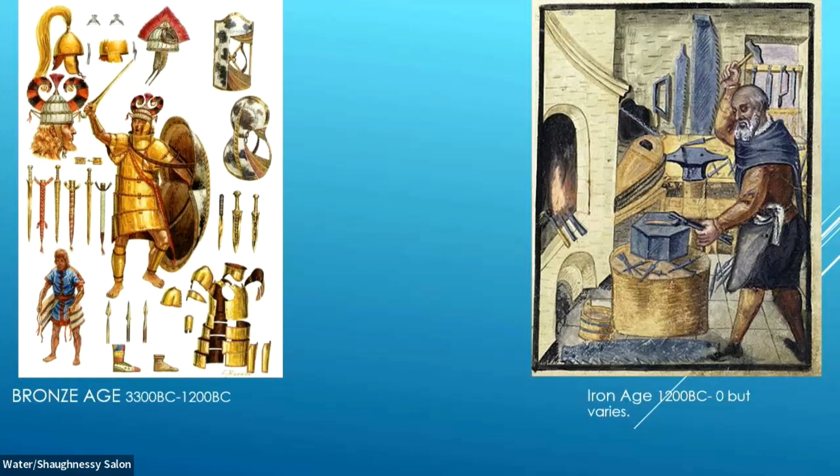So how do we deal with that? You're going to learn about different types of corrosion. I want you to know about all types of protection when we're dealing with corrosion. I am now representing IPP West, which is Integrity Pipe Products West. We deal with anodes, we deal with Denso, but there are different types of protection out there, and I'm going to show all of them to you. I'm going to show you what they do, what the downfalls of them are, what the benefits of all of them are. Because I'd rather you use something and think about corrosion in some way than use nothing.

Okay? What about this, for example? We're going to learn about different types of corrosion. This is the bronze statue that was found in England, actually. It's Roman. It was in the ground for 2,000 years. Why isn't it gone? It looks exactly like it did 2,000 years ago. Why isn't it gone? We're going to learn why, right?

But first, what I'm going to teach you is, where am I getting all of this information from, right? Well, I'm getting it from several places. NACE, I'm getting it from the American Petroleum Institute. I'm getting it from tons of different places. So I'm trying to collect all that stuff and put it together for you.

Sorry, I'm used to walking around and talking and engaging people, so I'm not used to standing behind a podium, but, oh, can I use that? Great. Sorry, camera guy, you're gonna have to follow, right? All right, cool. Did it work? Hello? Hey, guys. Can you hear me? Can you hear okay?

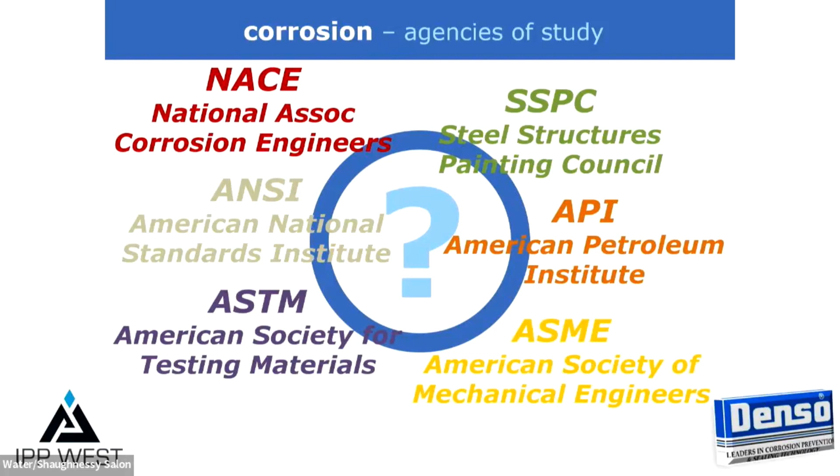Oh, there we go. Okay, so that's where I'm going to get it from. But here's a fun fact for you. Everything that we're going to talk about and everything that you're going to learn is all in the vitamins you take. Magnesium, phosphorus, copper. There. Is it better over here? Okay, so that's your fun fact.

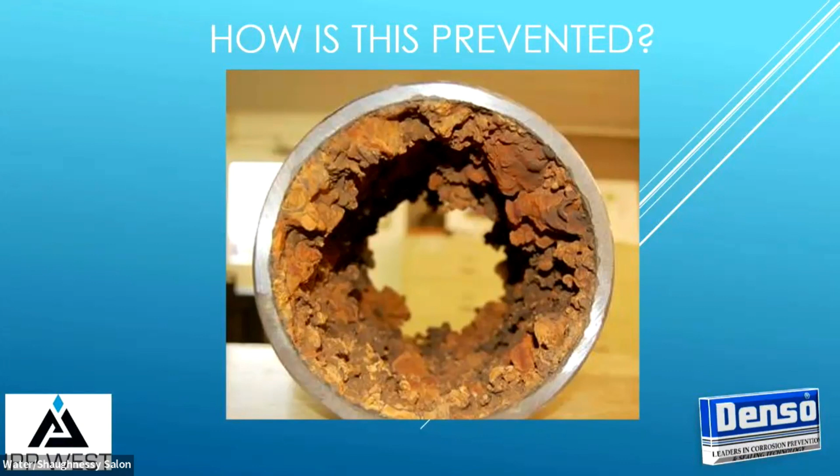What is this, guys? I mean, you can shout it out, but it's kind of redundant. But what is that? What causes that? First of all, what is it? It's called tuberculation. And tuberculation is when iron oxides attach themselves to an iron pipe. Okay, and so they... Here, I'll go. Can you hear me? So how is that prevented?

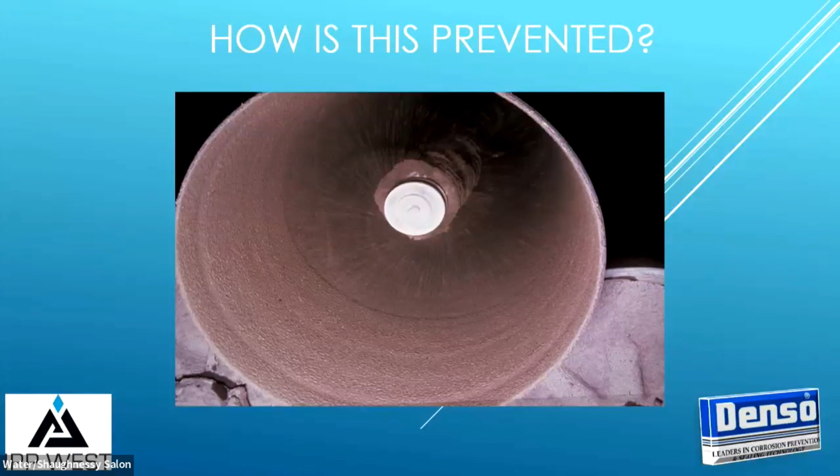What do we do? Well, it's pretty simple what we do to prevent that. Anybody that deals with iron pipe now, when you buy new iron pipe, you never see this. That's how we prevent that happening. We put a very, very simple cement mortar lining in it. Why does it stop it? The iron oxides in the water don't know that the iron is there, so it can't corrode. It's impossible now. So we're going to learn what different types of corrosion there are.

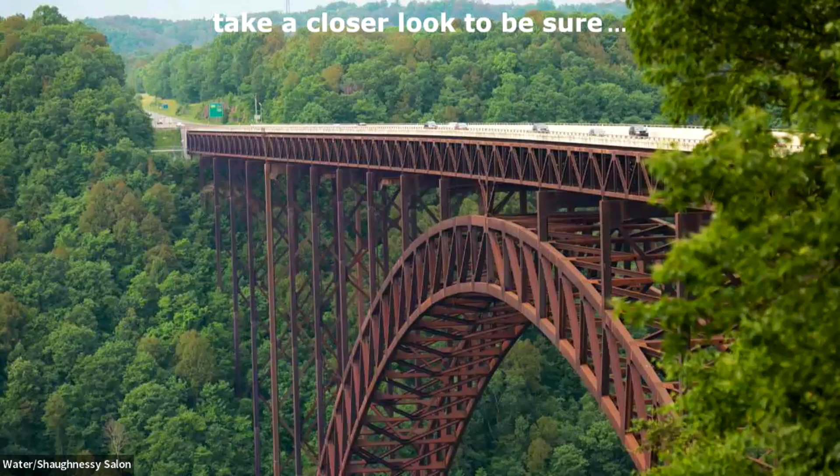Here's the trick one. Is this corrosion? Yes, but not really. Why is this not corrosion in the sense that we're talking about now? What is it missing down there? Oxygen, yeah. There's no oxygen down there, so what's happening to this ship? What's happening to the Titanic? It's being eaten, right? So it's not the corrosion that we worry about here because there's no oxygen.

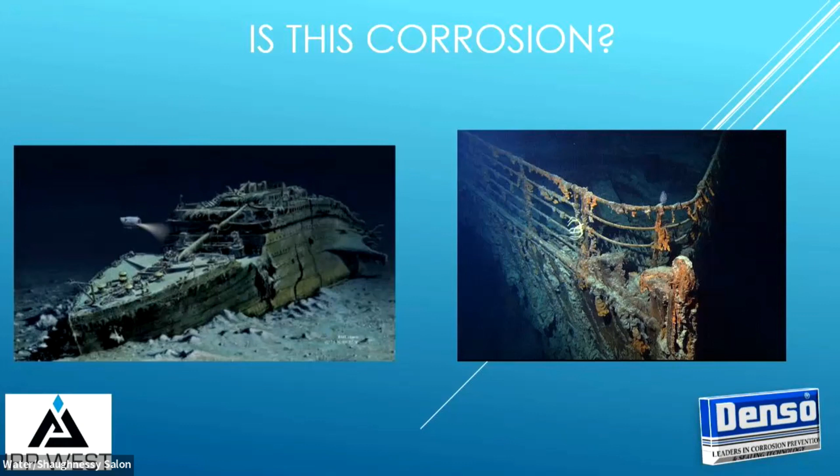So let me look at the two types. Now, like I said, I don't have a lot of slides that have a lot of writing, but these ones are important. The types of corrosion that we're talking about are microbial corrosion and galvanic corrosion. They're both important. Microbial corrosion is a biocorrosion. It's caused by microorganisms. Oxidation is another term. Rust is another term.

The iron pipe guys hate the word rust, but that's what it is, right? Galvanic corrosion is when a corrosion cell is created by an electrochemical process. So there has to be an electrical connection. That has to happen or you don't get it. Okay, and it's actually simple.

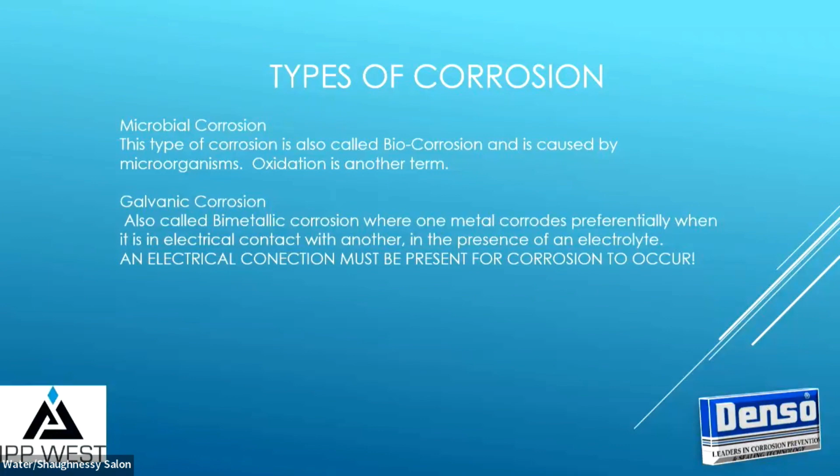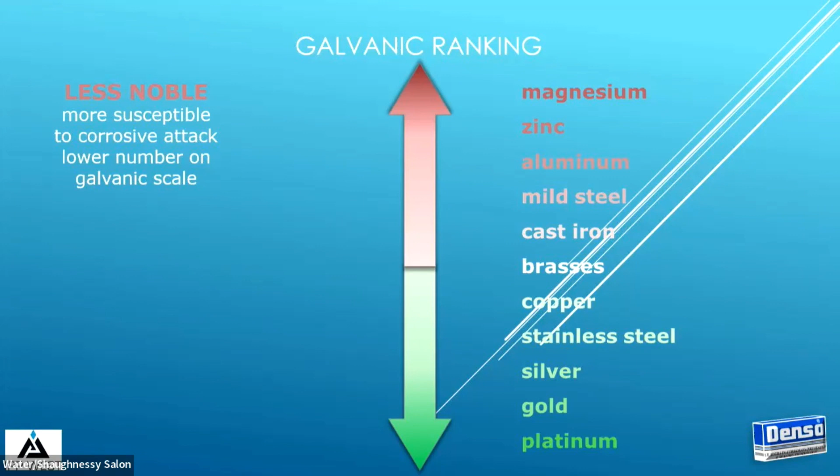So let's look at galvanic rankings, for example, okay? When we're talking about it, we're talking about magnesium, zinc, aluminum. Those are all highly corrosive metals, right? That's why we make anodes out of them. We want those to get corroded before we want the iron or steel to get corroded, okay? What's all the way at the bottom? Gold and platinum, right? Brass is another one that doesn't corrode very much. Copper is pretty good, but gold and platinum don't corrode. Well, we can't really make pipes and we can't really make bridges out of gold and platinum, so we have to figure out a way to protect them, right?

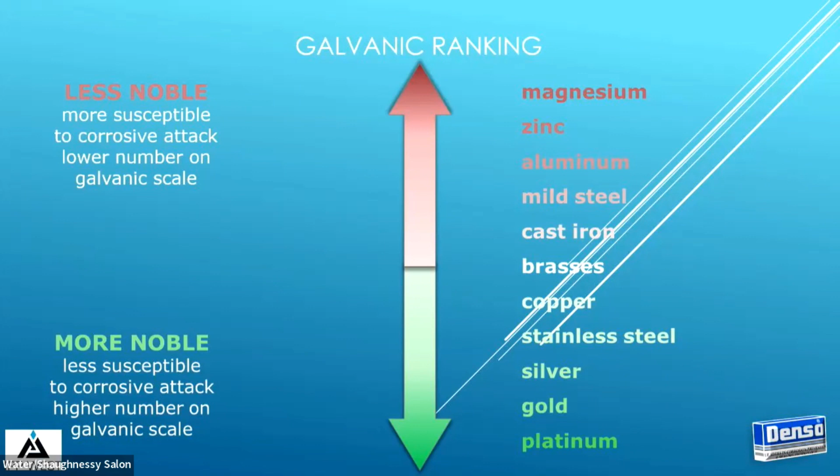So let's talk about potentials from the metal to the soil, okay? So we have less noble and more noble. Here it is right here, okay? When you see this, it's kind of confusing a little bit because we're talking about an electrical current, but I'm talking about minus numbers. Okay, what do I mean by that? Well, it's really important to understand, because when I talk about minus numbers I'm talking about the energy that's getting taken away.

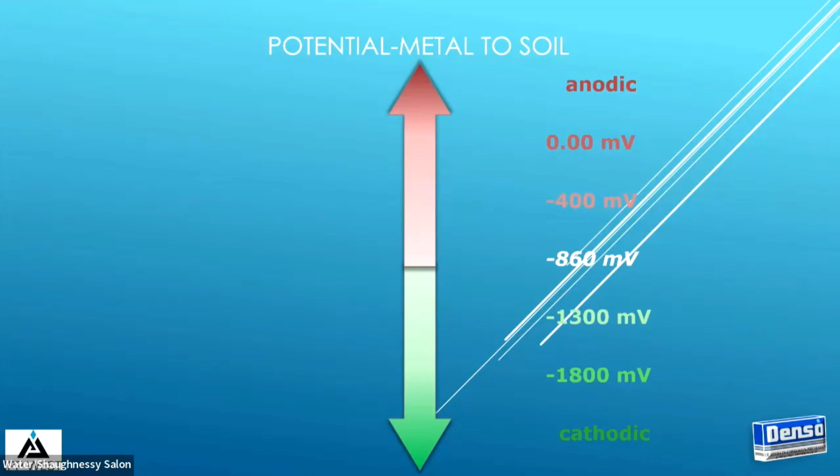Okay, when we make a material, whether it be a pipe, a valve, a restraint, a bolt, whatever we make, we put energy into it. We melt it, we form it, we shape it, we do whatever we have to do to make it. We pack it, we put it away, and whatever it is, we add a bunch of energy to it. What the corrosion is doing is it's taking away that energy with it. So, for example, iron, when it corrodes, it'll corrode at about minus 525 millivolts. That's an incredibly small amount of energy, okay? We're talking about a little battery like that, 3 volts. So it's not a lot of energy we're talking about.

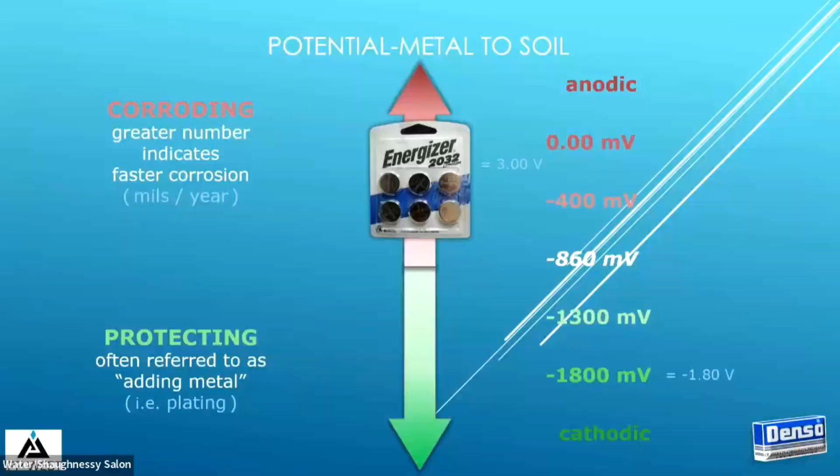So what can cause that? What are things that can cause that? Well, the soil itself can cause it, depending on what the soil is, whether there's iron, the redox value in the soil. So that can cause it. A rail line can cause it. A power line can cause it. Anything that's causing a stray current can cause it. It can be anywhere. It truly can be anywhere. It's not a matter of my soil.

If you're talking about an engineer that's been designing your lines and you guys are installing them or the operators are putting them in, and they're saying, well, our soil's not corrosive, that can change. They put a road nearby or they put a rail line nearby. They put a power line. They put a new subdivision. They dug up some soil that they didn't know. Now all of a sudden you have a corrosion cell that you didn't know that you had before. It can be anywhere.

But let's look at the ingredients. You only need 4 things. If you don't have one of these 4 things, you don't have a galvanic cell of corrosion, okay? It doesn't happen. So we have to have these four things. We have to have a cathode, an anode, a return current path, and the electrolyte.

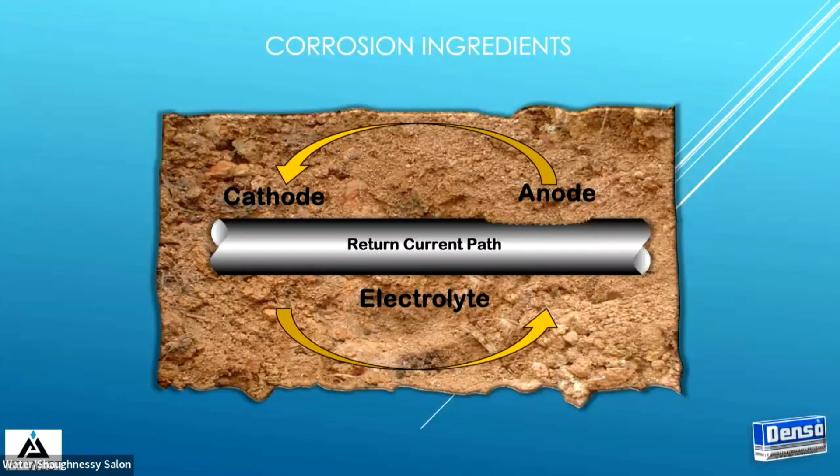So the electrolyte is the soil. The return current path is the metal component, whatever the metal component; in this case it's a pipe, but whatever the metal component is, that's what it is. And it'll always corrode at the anode part, which is why we have sacrificial anodes that we put on, right? So what if we took one of these things out? Well, then we don't have a cell anymore.

Since football season has started, let's do it with a football analogy, okay? We need a ball. We need two teams, a cathode and an anode. Winning team, a losing team. We have to have that. We have to have a place for them to play, which is a field. If I take the field away and they're just playing on nothing, can't play a game.

It's just that simple. Whenever I talk about electricity and electric currents and millivolts and amps and all these things, everybody thinks that's the stuff that's hitting the pipe, attacking the pipe or the metal component. It's not what's happening. They think it's this big current that's attacking it, but that's not what's happening. The energy is leaving and it's taking the metal with it. That's what corrosion is. Okay, so it's de-energizing metal components.

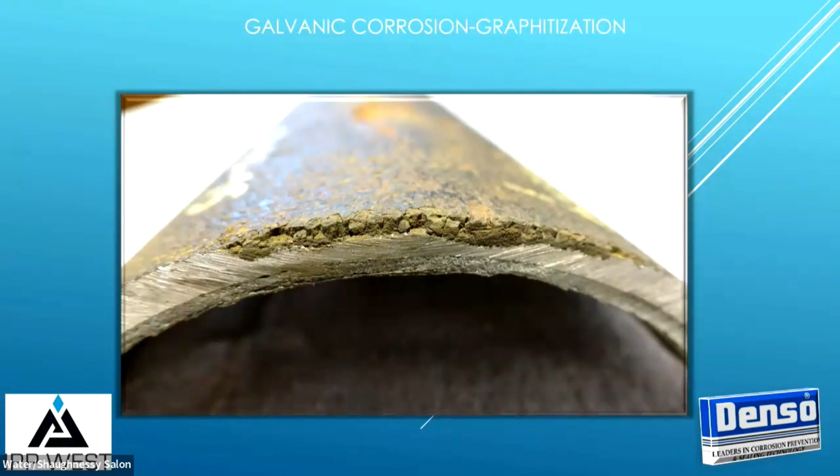And I have a really great picture here that'll show you exactly how it works. It looks just like this. So we're looking at this piece of pipe and it hasn't broken yet. What's happening? Well, it kind of looks like an apple crumble on the top there. That's where that energy is starting to leave. That's where the energy has jumped right off of that pipe and it's gone to a different place that it's attracted to.

So it's jumped off that pipe and it's gone on to something else, and it's taken that energy, that metal, and it's gone with it. And as soon as it gets down to the cement mortar lining, boom, you have a leak, right? So what do we do? First of all, what's the cost of corrosion?

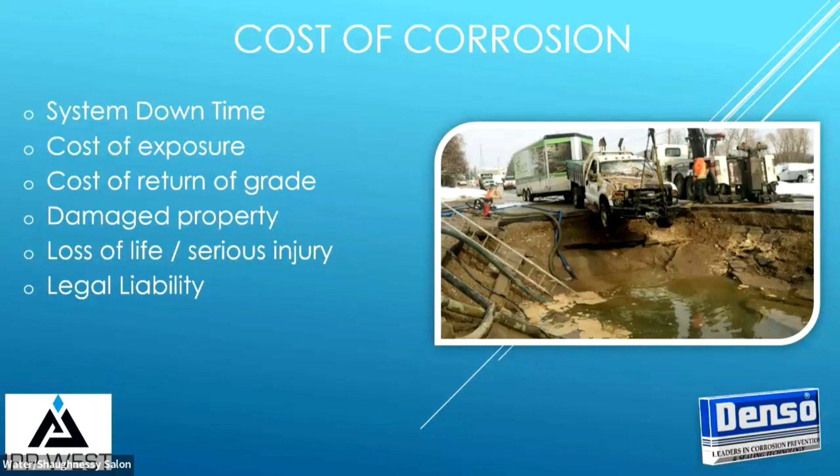But let's be real. Canada's never done a study on this, but the US has done a study on cost of corrosion. So let's use the US, and I'll break it down for Canada. The US did a two-year monetary study, and the direct effects of corrosion on infrastructure were found to be about $276 billion a year. That's a big number. What is that per person? About $1,400 per person, every living person, $1,400 a year.

How do you pay for that? Well, you don't get a corrosion bill in the mail saying this was your yearly cost of corrosion. You get it in taxes. You get it in water costs, all that stuff. So anybody will have to pay $1,400 a year down there. What does it cost for Canada? Well, if you extrapolate the numbers, we get about $363 a year per person. Doesn't matter how old they are.

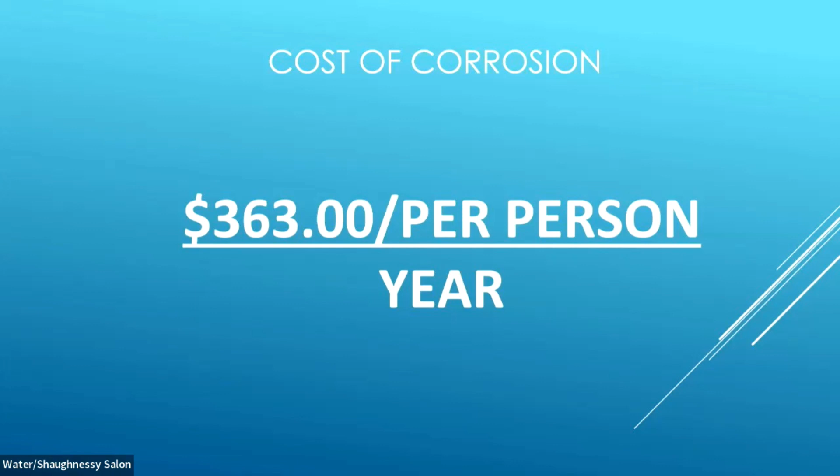There is a way to stop it, though. There are protections out there that can completely eliminate corrosion if we design them into our pipelines and our water lines. We can eliminate it completely. It's not something that we have to worry about. But what are those protections? We're going to go through all of them right now. So here they are.

So we have Denso petrolatum system, or petrolatum tape system, could be any, but I'm using Denso because that's what I represent. But cathodic protection is another one. We're going to learn exactly how it works, even though a lot of you probably already know. Zinc coating, polyethylene encasement, bonded coatings. Those are the main ones. There's other ones that you can use too, but those are the main ones.

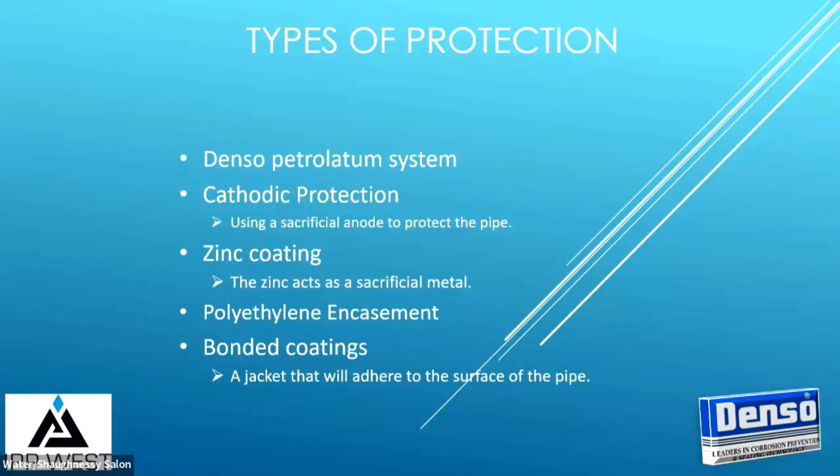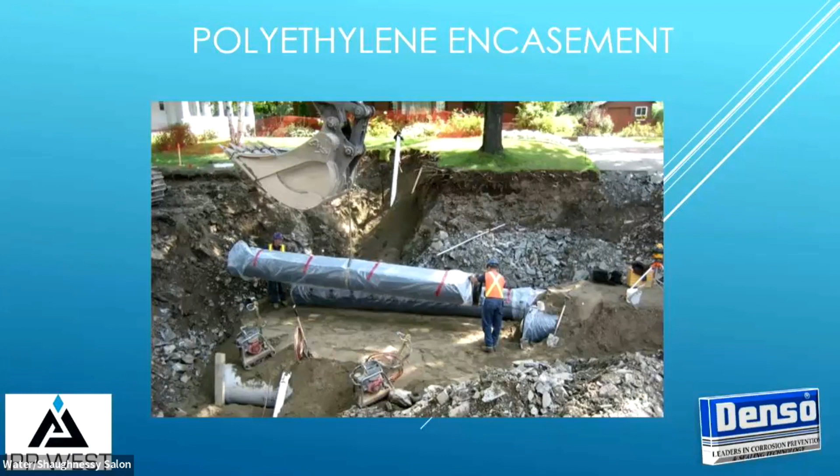So let's start. Okay, this is polyethylene encasement. This is what it looks like. All you're doing is blocking the return current path, like we talked about before. So what's really good about polyethylene encasement? Simple to put on, very cheap. It costs basically pennies compared to the pipeline that you're putting in. All you have to do is put it on, wrap it, tape it, and bury it, and you'll never have to worry about it again.

What's the downfall? You're probably thinking of some. I'm not going to make anybody yell it out. I'll say it. But the downfall is when you're talking about bends and curves and restraints and valves that you all have to protect, bolts, all these things you have to protect too. They're all susceptible to corrosion. So what do you do then?

Well, I always think of it like this, and it's kind of funny, but have you ever wrapped a Christmas present when you're drunk? Pretty hard, right? Like if you have to do this and you don't know where the tape is, so then you didn't do it right, and it's wrapped this odd shape. It's a lot easier to wrap things that are round or that it's just a square box. But when you're trying to wrap things that have a bend or have a big oddly shaped thing, you start to get a problem.

Now you may think it's wrapped, and they'll tell you when they sell polyethylene encasement, hey, you can wrap anything with it. And technically you can, but when you wrap something that's an odd shape, you have a problem. And if you have a hole in it, you rip it that you didn't know, you're going to get corrosion. It's going to happen. So there's your downfall to it. It's not great. It's great for bell spigot pipe, but maybe valves, hydrant, or valve hydrant leads, maybe restraints, anything like that you have to think about.

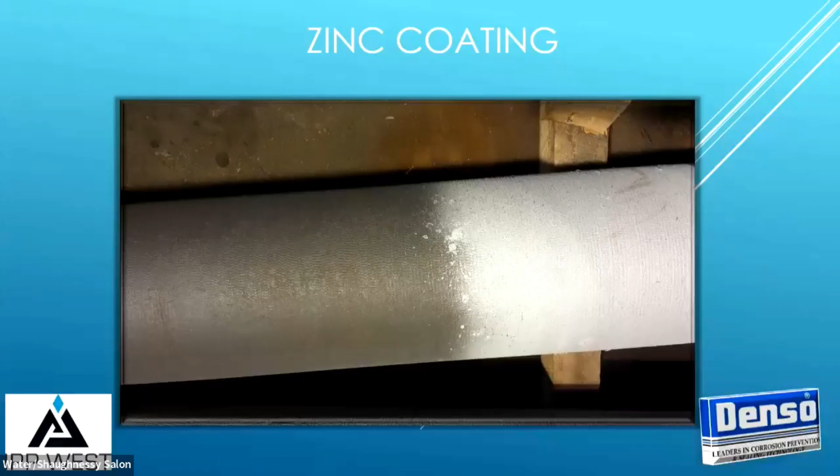A lot of places in Europe use zinc coating. So what's good about zinc coating? Good about zinc coating is it comes from the factory already done. As the installer, you don't have to do anything. It's already done. And zinc is what? That we learned before, right? It is a less noble metal, so it'll corrode fast. Faster than the iron will. What's the downfall? You created a sacrificial anode on the pipe. You just painted it on. So what, it'll last 25 years?

Maybe? Right? In Europe, they use it because they have less aggressive soils than some of the places here. And so the philosophy is that when they put a zinc coating on, it'll create a barrier just like the Cor-Ten steel did. But the problem with that is that, first of all, we don't know that's what it's going to do. We won't know for 25 or 30 years if that's what it's going to do. But zinc in itself is a sacrificial anode, right?

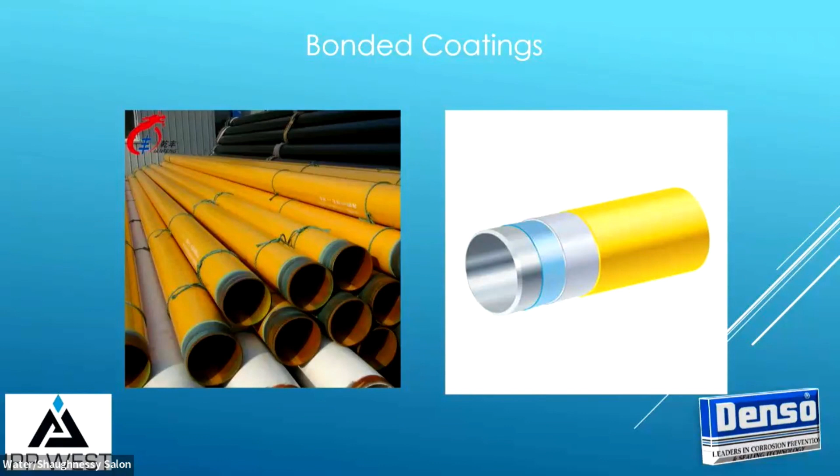A lot of places, the oil and gas industry use bonded coatings all the time. And what's good about a bonded coating? Comes from the factory already done. It is efficient, blocking the return current path. It's protecting the metal underneath. What's the problem with it? Well, a lot of oil and gas places will use it, and they don't have to bury it. We have to bury water lines. That's what we do. What happens when you bury this in aggressive soil? Scratches, holes.

What happens when you get a hole? It's actually called something specific. You guys probably have already heard of it. It's called a holiday. And when you get a holiday in a piece of bonded coating, you get a super concentrated cell. Everything that we talked about, everything that we've seen, it is now super concentrated. If it's a hard, aggressive soil, it'll go within 5 years. You'll have a hole. If it's less aggressive, 10, but it's still aggressive. Okay. What about anodes? Anodes are a super great, awesome way to do it.

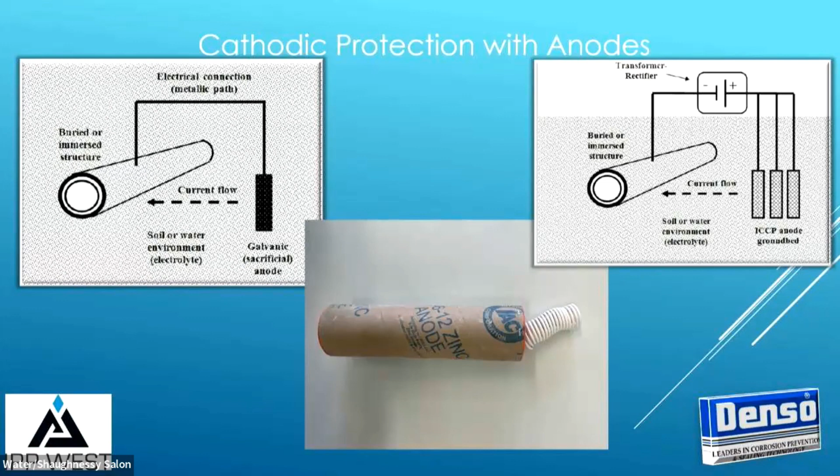They will guaranteed protect the material you're trying to protect, because corrosion will follow what it needs to corrode. It'll follow the less noble metal. That's just science, that's what it does. It'll corrode the anode before it corrodes anything else. And if you keep up on the anodes, that pipeline will never corrode. It just can't. But what's the downfall of it?

Well, the downfall of it is labor. You have to put it on, right? That's your downfall pretty much, is labor, cost, put it on. Sometimes it's not an expensive cost, but it is. There's more things with that.

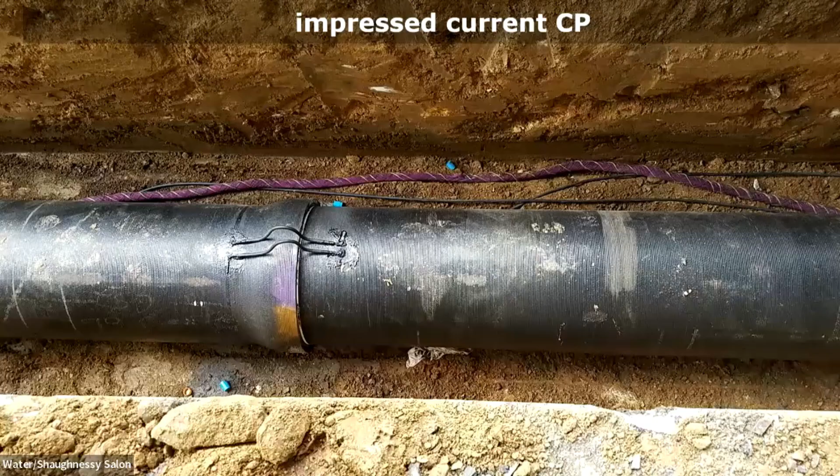Have you ever seen impressed current? Impressed current is another one, and it's basically a monitored anode. When you're seeing this picture on the screen, that purple rope you see at the top, that's the anode, and this has to be replaced. That's the downfall. The benefit of impressed current is we know exactly when it's going to corrode and when it's going to fail. We know when that's going to happen.

20 years - you'll have to put it on a schedule. So in the life of this particular pipe, you'll have to replace that anode 4 times. So that's cost in digging it up, right? So that's what we're talking about.

And what we're doing with impressed current is we're bathing that whole pipe in one current. Let's just throw out a number - let's say it's 900 millivolts. So everything is 900 millivolts across the board. So it'll never corrode, it just can't. It'll always corrode the anode first. That's just the way it works.

The other one we're going to talk about is petrolatum systems, and it is a system. Many people look at it like a tape - it's just a tape, it's not. It's actually a system; there's three parts to that system: the paste, the mastic, and the tape itself. What are they? A paste is an oxide barrier - it'll actually protect that, stop oxidation from happening. It'll also make it more adherent to the tape.

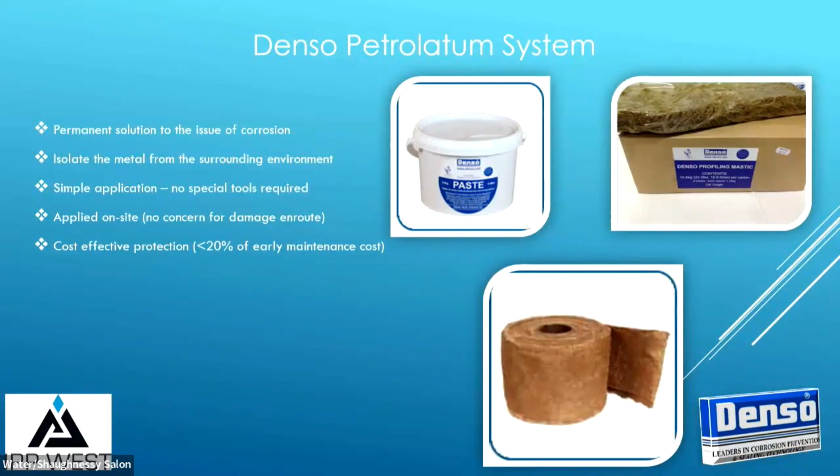Mastic, basically - when I talked about wrapping a Christmas present when you were drunk - well, what mastic does is make that shape uniform, so it's easier to wrap and you don't have to worry as much. The difference between, say, a Denso mastic and somebody else's is it's a polystyrene bead, so it stays the same in every temperature. It's easier to use in every temperature, if you ever need that.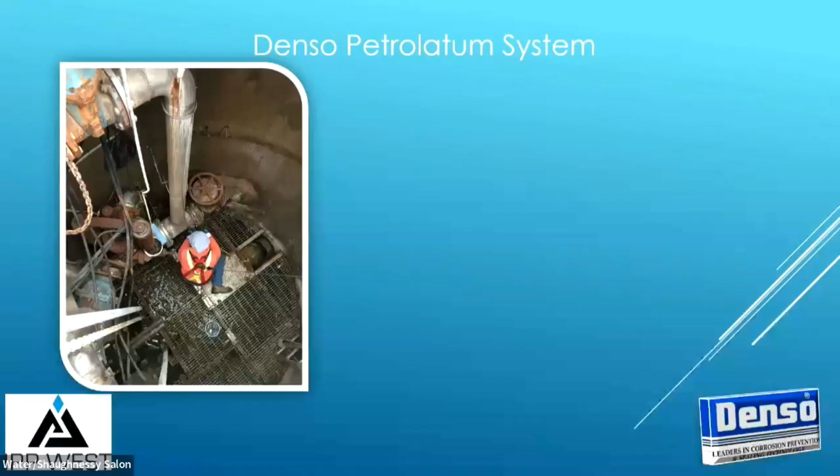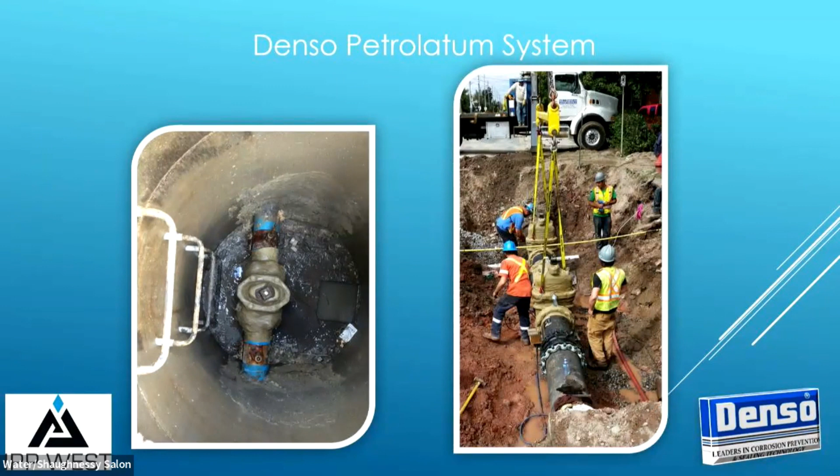Here are some examples of them doing just a valve - wrapping a valve. And they're just doing that, wrapping the valves, wrapping the restraints. You're making it bulletproof, is what you're doing.

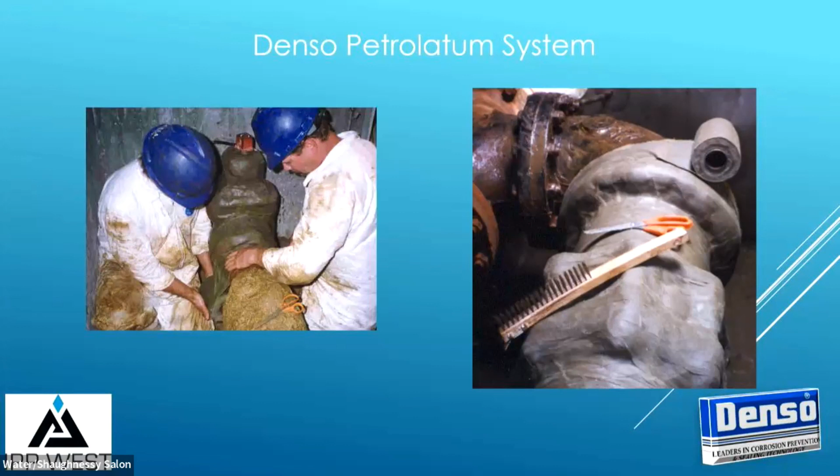They're using that mastic, and it's a messy job. Even though I represent the Denso stuff, I'll tell you it's easy to put on, but it's messy. There's no doubt - some people don't want to do it, some guys don't care. But it's easy to put on, even though it can be messy. So, it's a permanent solution.

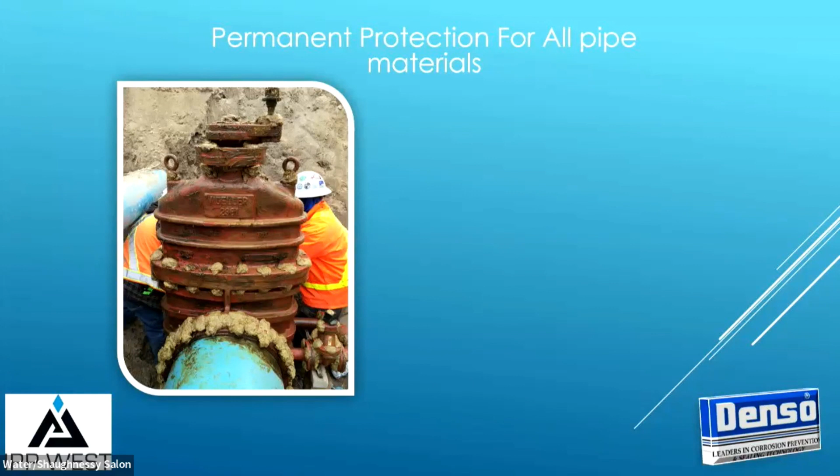This does not have to be changed or replaced. It's actually very durable - even when you dump a bunch of dirt on it, it'll still stay the same. It'll actually mold with all that stuff. And if you ever need to repair it, you can rip it off and put another one on.

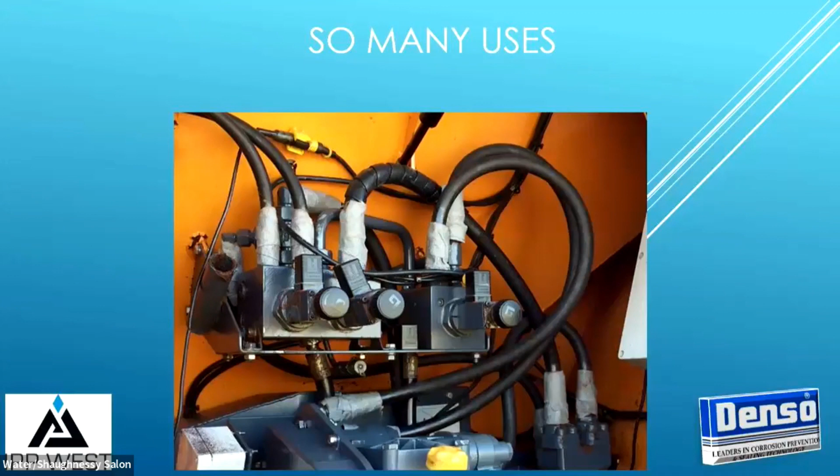There's tons of uses for it. People put it on their hydraulic lines in mining. People can use it in city trucks too. There's lots of places for Denso.

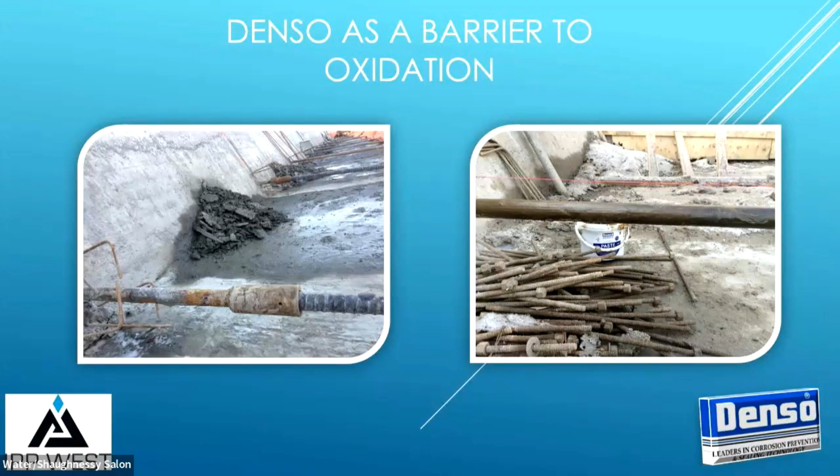But it's a permanent solution. You can use it around catch basins, all those kind of things.

There's a new product out, it's called Viscowrap. Basically you don't have to use any paste, you don't have to do anything to the pipe. You can just wrap this right on.

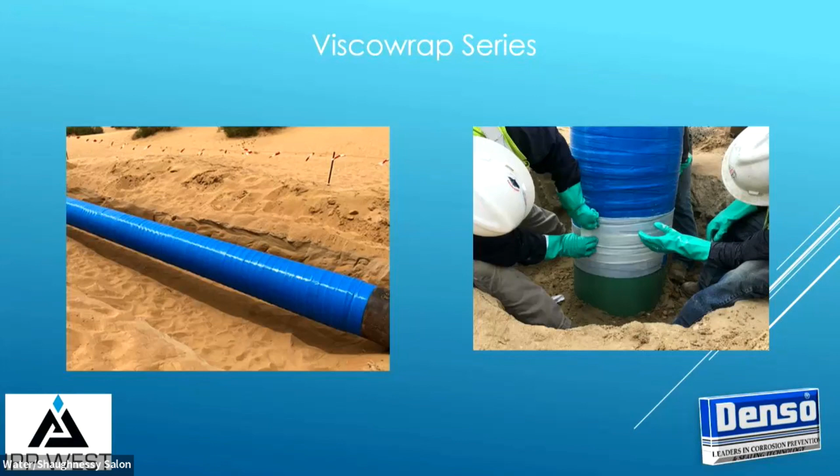It is permanent though. Once it goes on and you put a fiberglass outer wrap on it, it's not coming off, it's permanent. You can cut it off, but you're not going to be able to take it off like an LT tape. But it's very user friendly, goes on incredibly fast.

It's great for anodes, which is what I would think of it for that kind of thing.

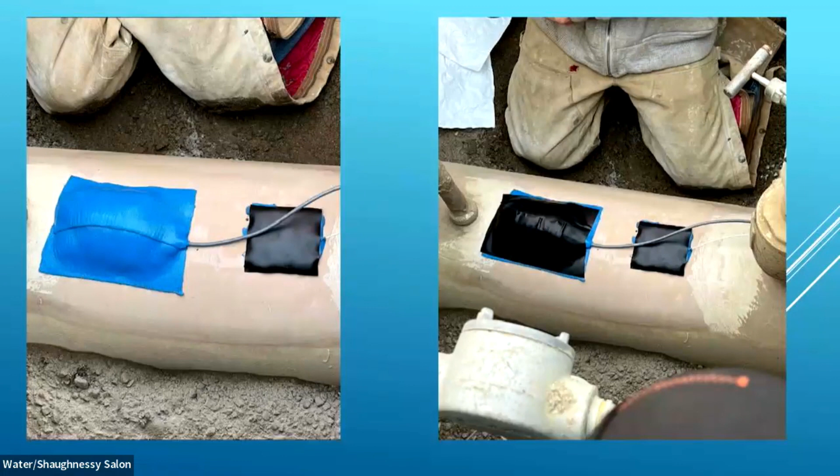We've been asked by a lot of places to use this. We came up with this Denso spec, and it doesn't say Denso anywhere on it, but it is a friendly Denso spec. So if anybody's interested for their own communities and wants to learn how to be fair to everybody else, but still be able to protect their own lines, that's what we use as a Denso spec.

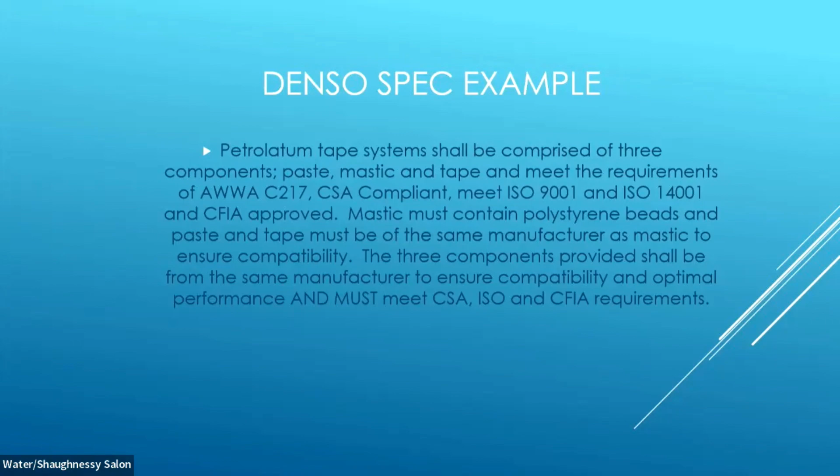But when we're talking about all this stuff, like I said before, we have likelihood and we have consequences. What is our likelihood? Well, let's look at them. Likelihood and consequences, okay? Likelihood is the soil itself. What is corrosion that we've learned?

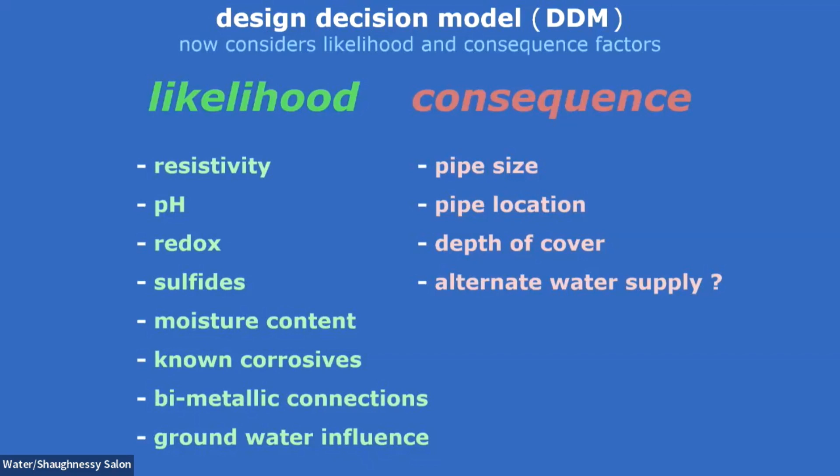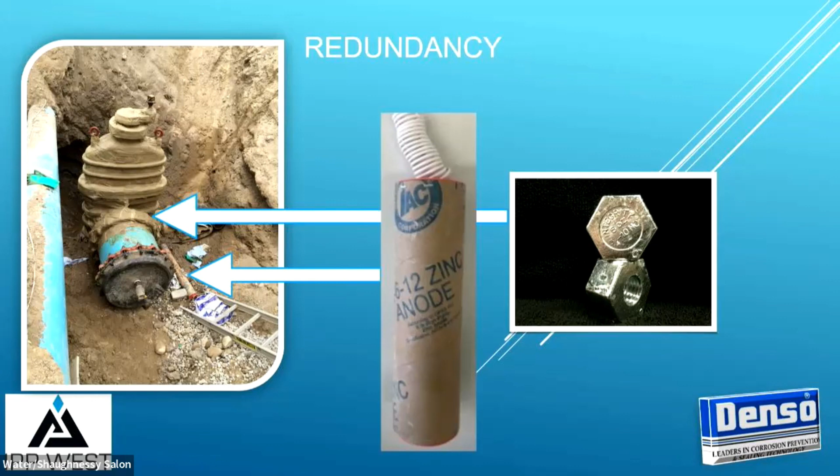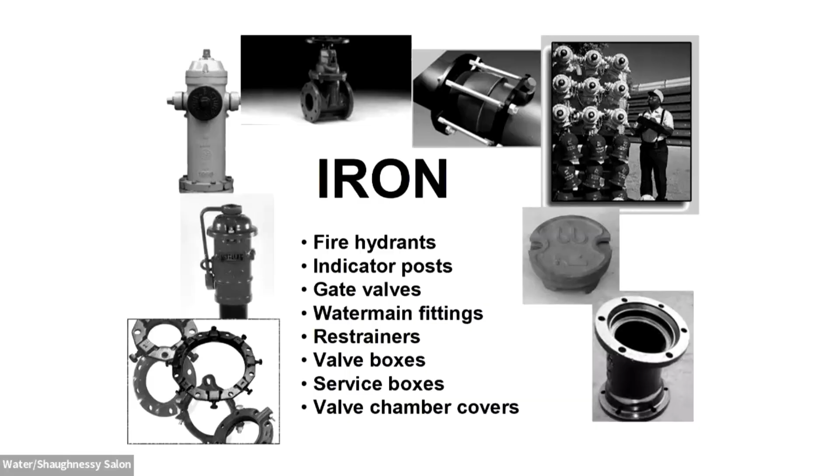What I want you to get out of this presentation is that everywhere is iron. It doesn't matter, you're using iron everywhere. Even if you're using PVC pipe in the community, which is a great step, iron's everywhere. We have to find a way to protect it. It's in all these things: fire hydrants, indicator posts, gate valves. I could go on and on, right? Corrosion will attack everything.

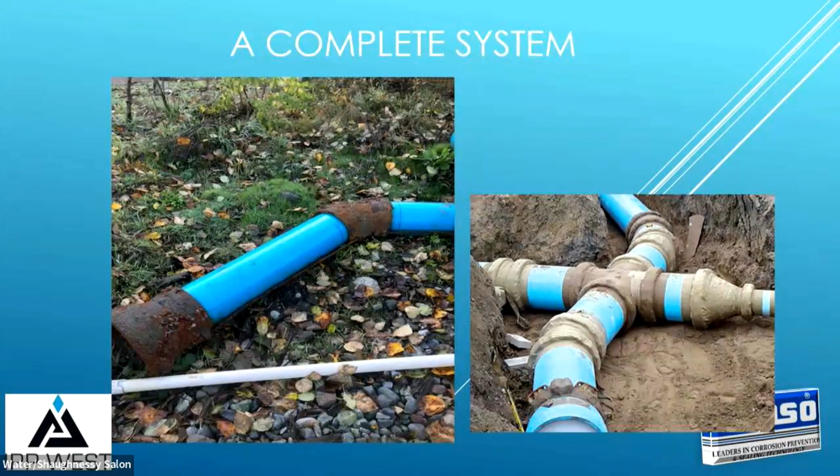They're burying it like this, they got a problem in a little while. Here's an example of a community in BC - that's what they did, they buried that line, and that's what it came up like within 10 years. The one on the other side is how it should look.

Okay, that's it from me, guys. I appreciate your time.